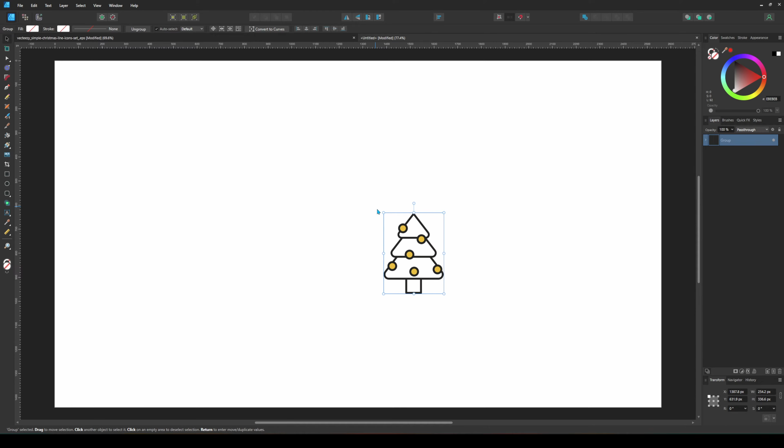Now I'll export this as an SVG. The reason we use SVG is that Fusion 360 can import it directly as a sketch - all those vector paths become lines and curves we can work with. I'm just making sure the export settings are correct, and we're good to go.

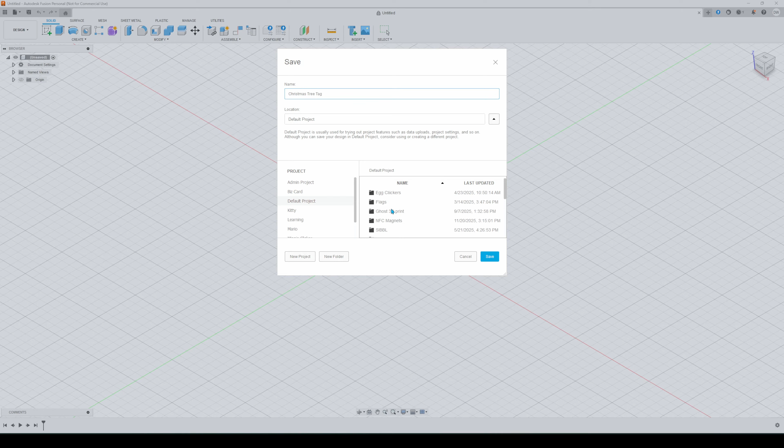Alright, we're in Fusion 360, and before I do anything else, I'm saving this document. I cannot stress this enough - always save your file before you start working. There's nothing worse than losing an hour of work because Fusion crashed and you forgot to save. Trust me, I've learned this the hard way. Save early, save often. Now let's bring in our tree.

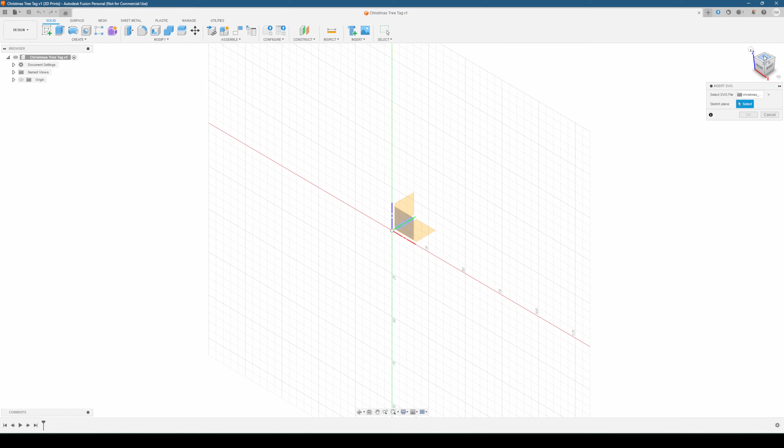I'll go to Insert, then Insert SVG, and choose from my computer. For the plane, I'm selecting the top plane - this is important because it determines how our sketch is oriented. And there's our tree. For the first time ever, this came in at a reasonable size.

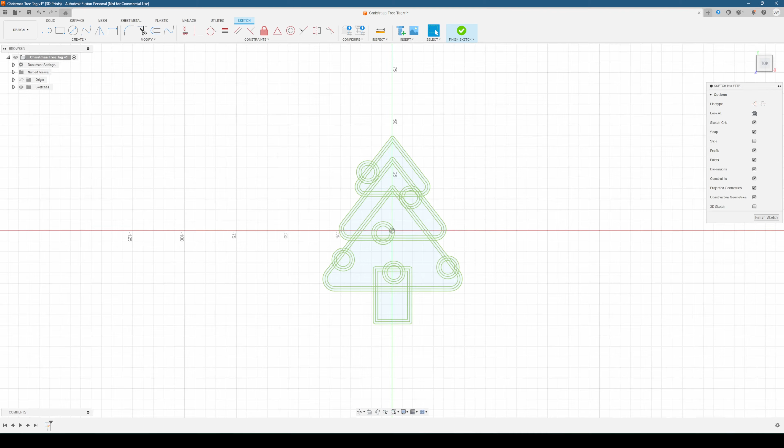All I'm going to do is position it roughly in the center. We don't need to be too precise here since we aren't going to be measuring much. And here's where the fun begins - I'm going to select the entire tree outline, all of it, and extrude it downward by 3mm. This creates our base layer. I'm using -3mm because I want this to be at the bottom of our model.

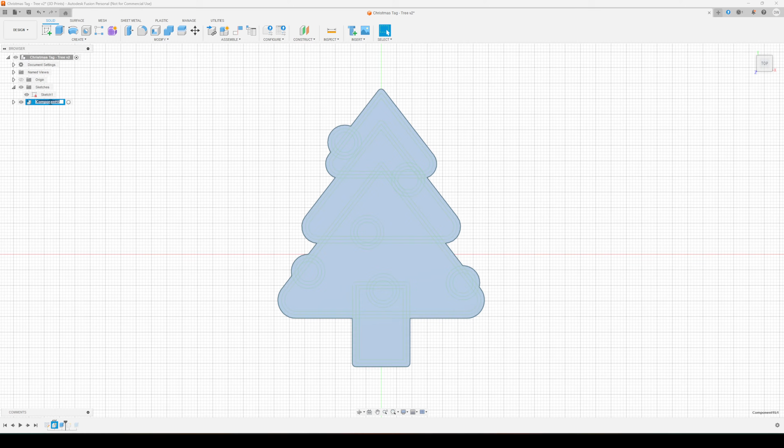Notice that I'm creating this as a new component. I'll be doing this for each colored section - this is crucial for our next step when we bring it into Bambu Studio. Try to rename them as you go, it makes it easier to manage later on.

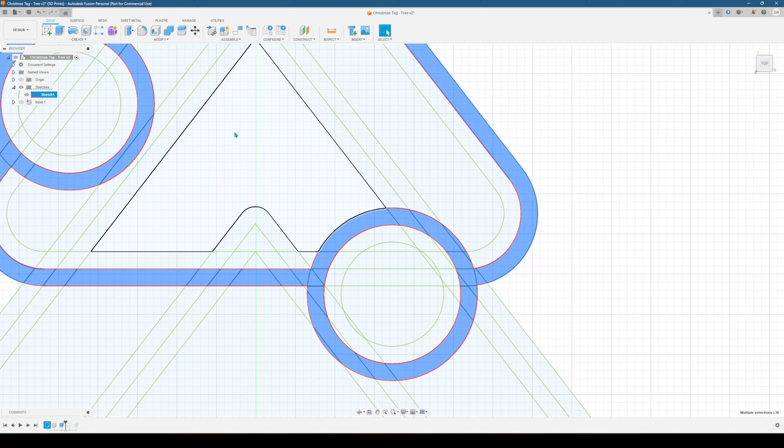Now I'm extruding the outline edges - these will be the black lines in our final print. I'm doing 0.8mm up from the base. This is a bit tedious because I need to select each outline section individually. I'm working my way around the tree, making sure I get all the edge pieces - each one becomes part of the outline component. I actually missed a piece here, which I'll fix in a minute. I'll show you how to deal with that in a nice, clean way.

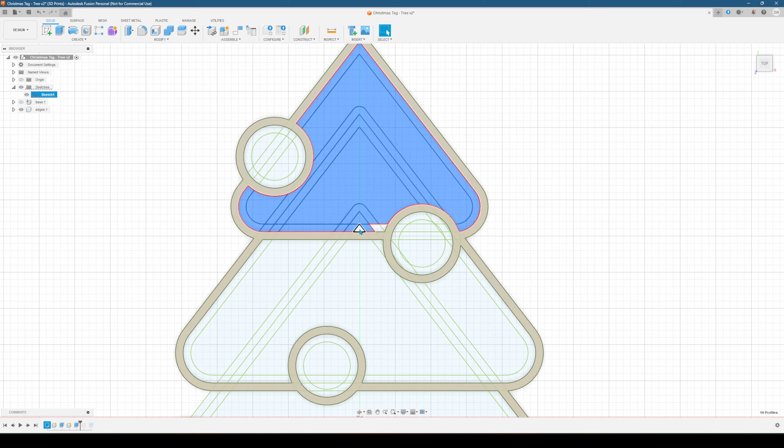Next up, the top section of the tree. I'm selecting just this top portion and extruding it up, creating it as a new component, renaming as I go - tree top for this one. Same process for the middle section: select, extrude, new component, rename, tree middle.

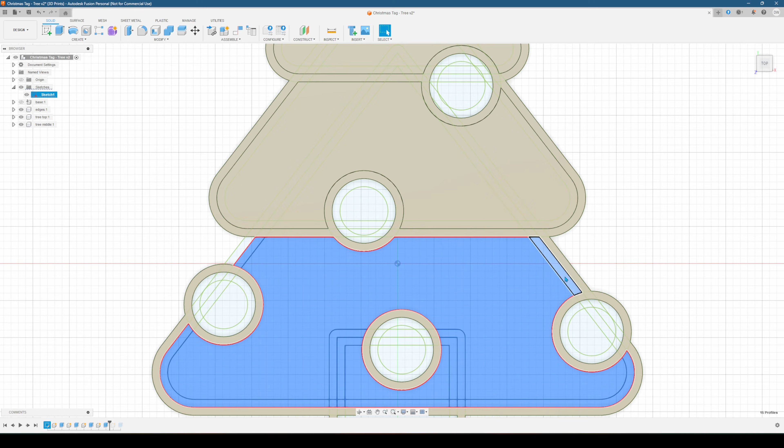And the bottom section of the tree. You can see how we're building up these layers. That will give us enough control in Bambu Studio, particularly if we have multiple AMS units and can do more than 4 colors, or if you wanted to add pauses and switch filaments mid-print.

Remember that outline piece I missed? Here's a good tip - I'm hiding all the other components so I can see just the outline. Now when I extrude this piece, instead of new component, I choose join. This adds it to the existing outline component. Problem solved.

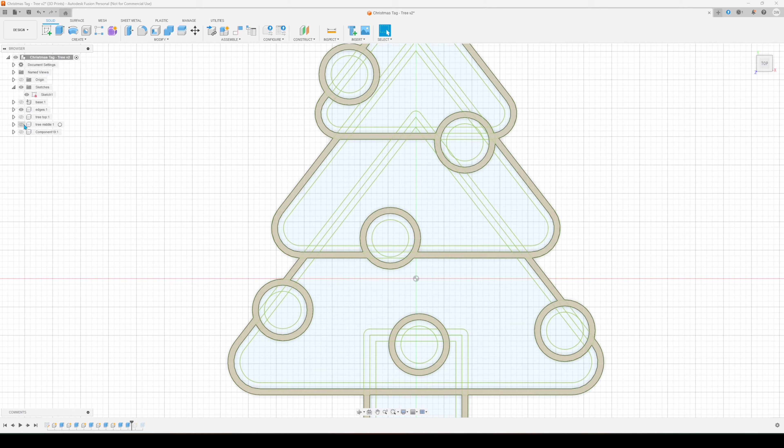Time for the ornament balls. There are 6 of them and I'm extruding each one to 1mm. This is pretty repetitive, so I'll speed through this - same workflow each time: select the ball, extrude, new component, rename. Ball 1, ball 2, you get the idea. We'll be able to change colors of each ball when we set everything up in Bambu Studio.

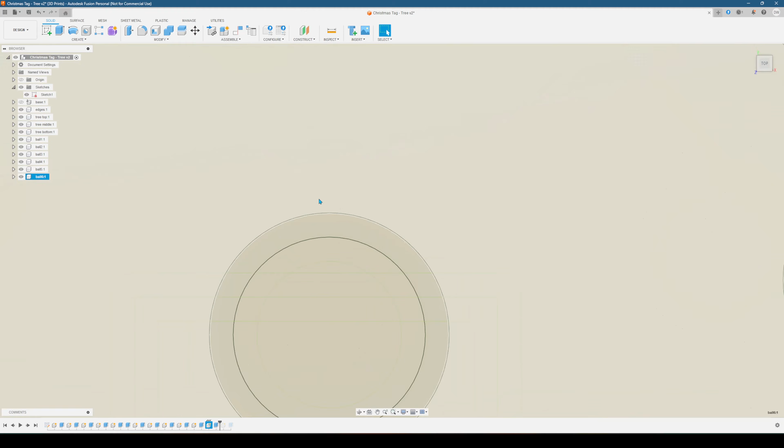Last piece, the trunk. Quick extrusion, new component, and we got all our tree parts built.

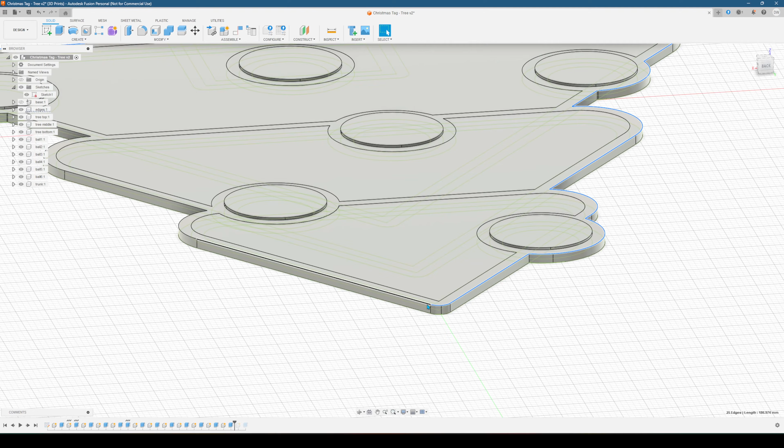Now I want to soften these edges - nobody wants sharp corners on a gift tag. I'm selecting all the top edges of the tree sections and applying a fillet of 0.3mm. This gives us a nice rounded look that'll print cleanly. The key here is patience - you need to select each edge. It takes a minute, but the result is worth it.

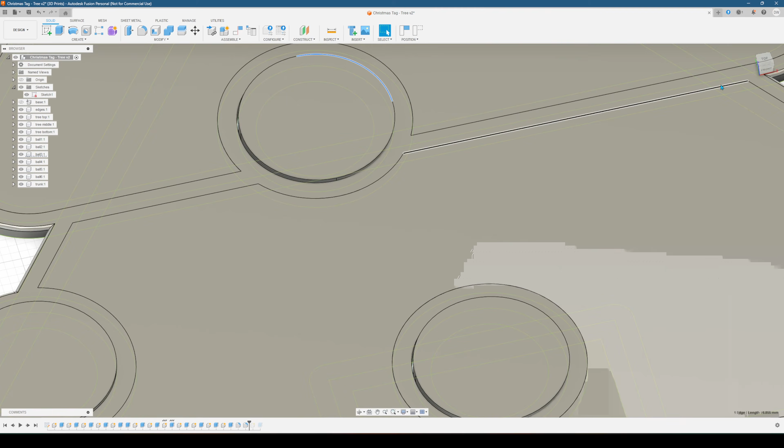Same thing for the ornament balls, but I'm using 0.2mm for these since they're smaller. Actually one of them threw an error at 0.2, so I dropped it down to 0.05mm. Sometimes Fusion doesn't like certain fillet values on tight geometry. When that happens, just reduce the radius until it works.

Alright, our tree is done in Fusion. I'm exporting this as a step file. Step preserves all our separate components, which is exactly what we need when we go to assign colors in Bambu Studio. After this, we're done in Fusion.

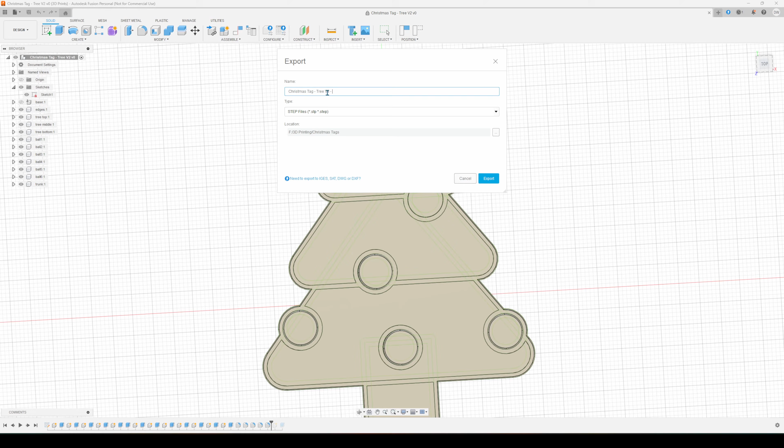Over in Bambu Studio, I'll import the step file. And look at that, all our components come through. I'm assigning colors now just to visualize it. Don't worry about the exact colors, I'll change them before printing. Just doing a quick slice here to see what we're working with in terms of printing time.

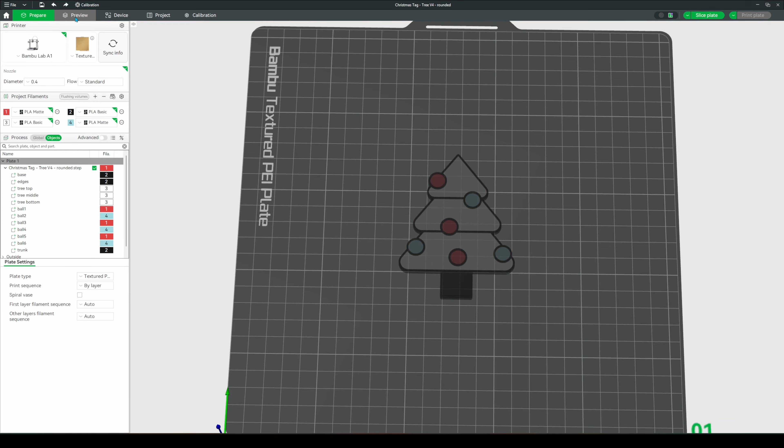Let me just move this aside while we build the tag. For the tag itself, I'm working directly in Bambu Studio using its primitives tools.

I'll start with a rounded rectangle. This becomes our tag body. I'm setting the Z height to 2mm for thickness, and the dimensions to 30 by 55mm. That's a nice gift tag size.

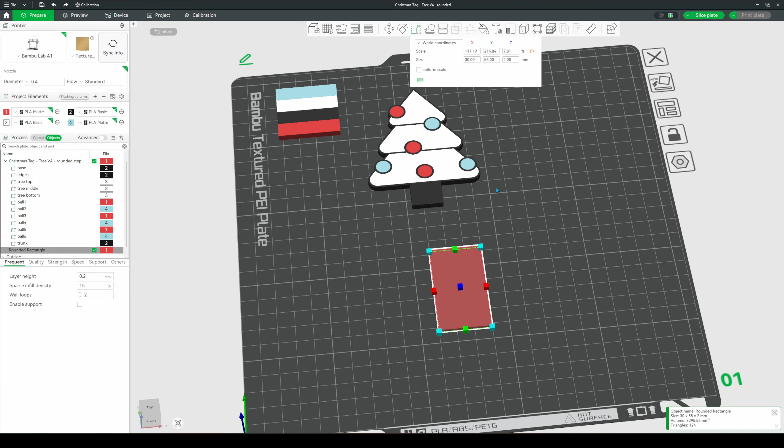Here's the trick for getting that classic gift tag point at the top. I'm creating two more small rounded rectangles, then rotating one to 45 degrees and the other to -45 degrees. I'll position these at the top of our tag. They're going to cut away material to create that pointed shape.

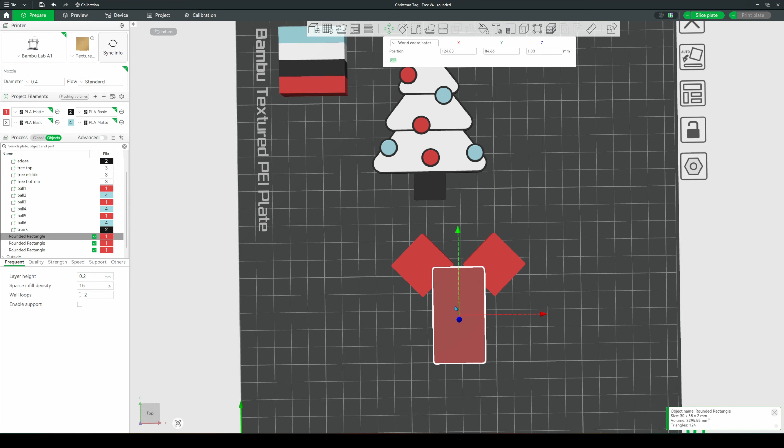I'm using the alignment tools to get these perfectly centered, as much as I can anyway. Let me know in the comments if you'd like me to do a video on how to use the alignment tools. They're also not that intuitive, and I've seen them not work correctly as well.

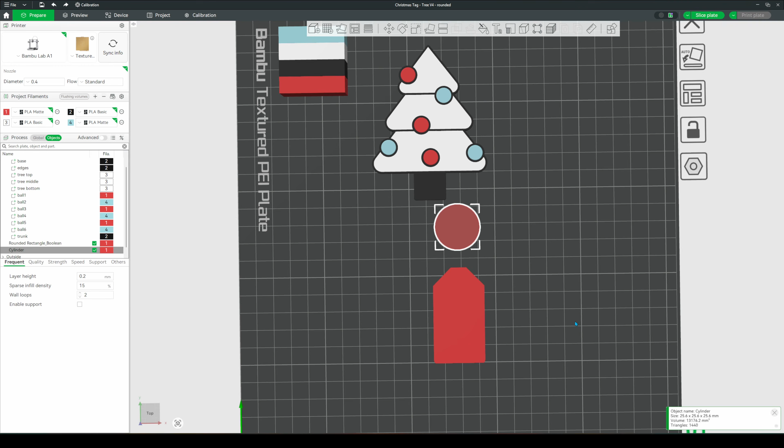Now the magic. I'll be using Boolean subtraction. I select my tag, then subtract these two angled pieces, and boom, we've got our gift tag shape. Clean and simple. Every gift tag needs a hole for a string or ribbon.

I'm creating a small cylinder, scaling it down, and using the alignment tools to center it in that top triangular area. Another Boolean subtraction, and we've got our hole.

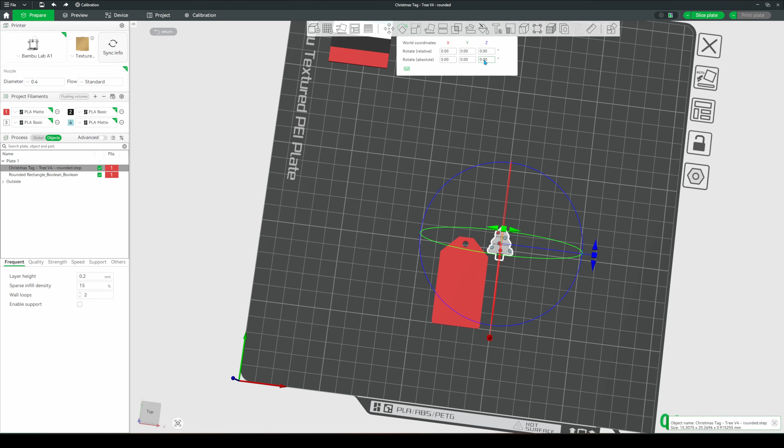Now let's bring it all together. I need to scale down the tree to fit nicely on that tag. It should sit on the right side, opposite the hole. I'll eyeball the position a bit here.

However, to make the tree be on top of the tag, we have to do something else, otherwise we won't be able to move the tree upwards. We have to merge it so that they become one unit. After doing that, I can raise the tree up and position it until it looks good.

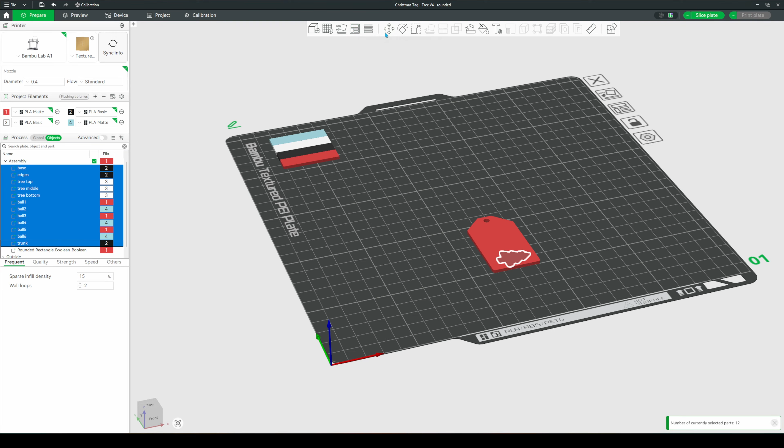I could do some math here with the tag and the tree heights to get the tree to sit exactly on top of the tag. But I'm lazy and I'm just going to eyeball it until the tree looks to be in the right spot.

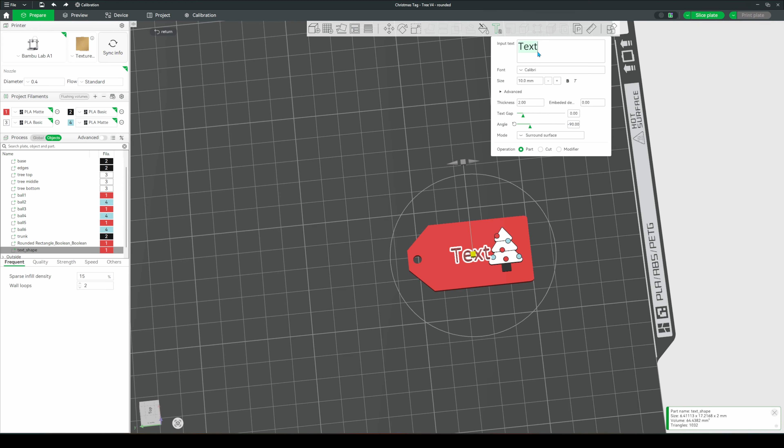Last piece, the text. I'll select the tag and use the text tool. I need to rotate this -90 degrees so that it reads vertically along the tag. I'll write my first word, then change to use the Mistral font for that festive script look. I'm going to change the size to 8mm and set the thickness at 0.8mm.

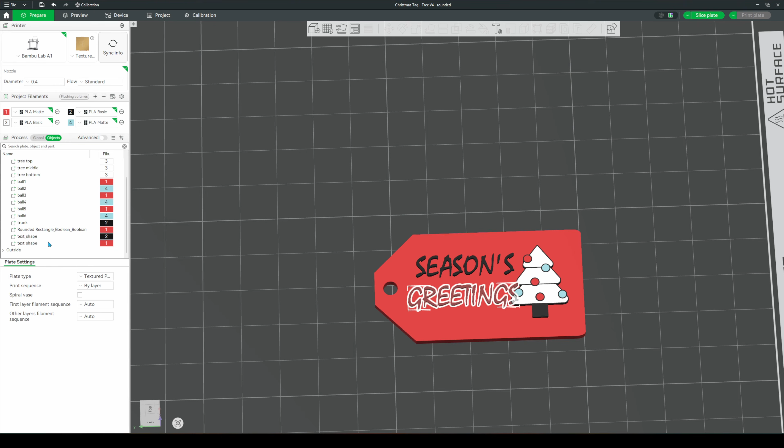Now for greetings underneath. Same font, same rotation. I'm going to eyeball the positioning here too. I can't use the new distribute tool in the move panel because you need 3 objects, and if I try to use the tag as a third object, it won't spread the words evenly across the tag like I want it to.

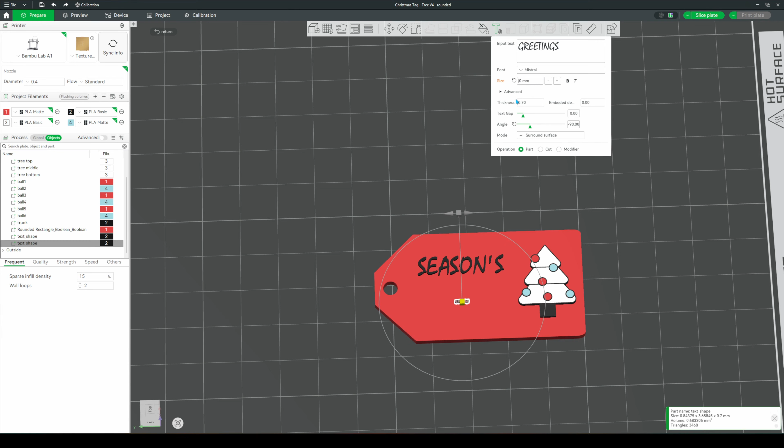And here I actually make a mistake. I changed the thickness to 0.7 instead of the size to 7mm. Easy mistake to make when you're going quickly. Let me fix that. There we go. Always check your values.

A little adjustment on positioning, and our design is complete. I can hear all the haters in the comments now to use a CAD program instead of the slicer, but I think you're wrong. You should use whatever tool you want if you can make it work.

Before we print, let's dial in the settings for maximum detail. I'm making several changes here. For line widths, I'm dropping everything down to 0.25mm. Internal solid infill and support go to 0.22mm. Thinner lines mean finer detail.

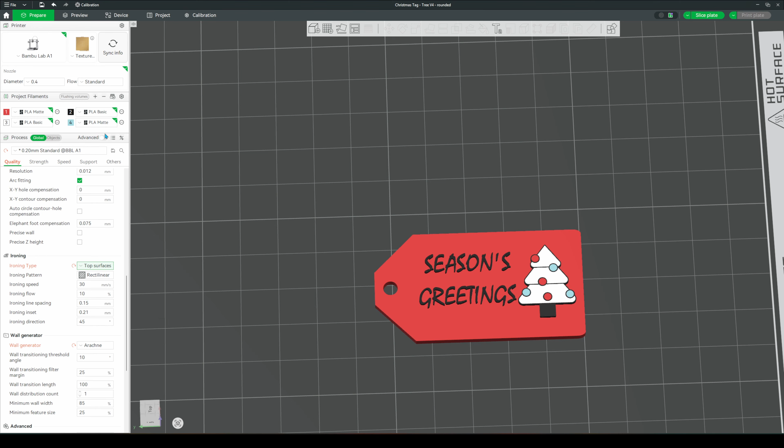Slice gap closing radius goes down to 0.04. This helps with small features. I'm turning on ironing for top surfaces, which will give us a smooth finish on those flat areas. Wall generator switches to Arachne, smarter about variable width walls.

I made some other adjustments to speed, making everything a bit slower so as to get maximum detail, and tweaked a couple of other things which may not do much. But I think that's it, we're done here. Now let's send it to print and see how it comes out.